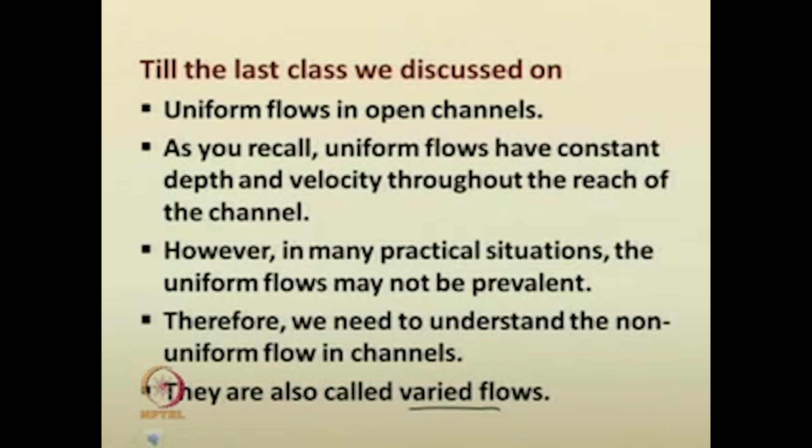So what are the various types of varied flow, or what is meant by varied flow? Generally, non-uniform flow in open channels is called varied flow. You may encounter several types of non-uniform flow. Some of the cases you might have seen: if you construct a dam, from the spillway the water splashes out to the downstream. This is a particular type of non-uniform flow. We will discuss what category of non-uniform flow this is called, in the later part of this lecture series.

You will see that if there is any block in the flow path, the water in the upstream gets raised, and a wave may get generated. These things are also non-uniform flow. So we will deal with all those things.

Non-uniform flow is mainly based on how the uniformity of the flow condition varies with respect to space as well as time. If the flow varies with respect to time, it is called unsteady flow, and if it varies with respect to space, it is called varied flow—in hydrology courses one might have already studied distributed flow, lump flow and all. So we will see, according to our course structure, how to study these non-uniform flow mechanisms, how the flow may vary with respect to space, time, or both.

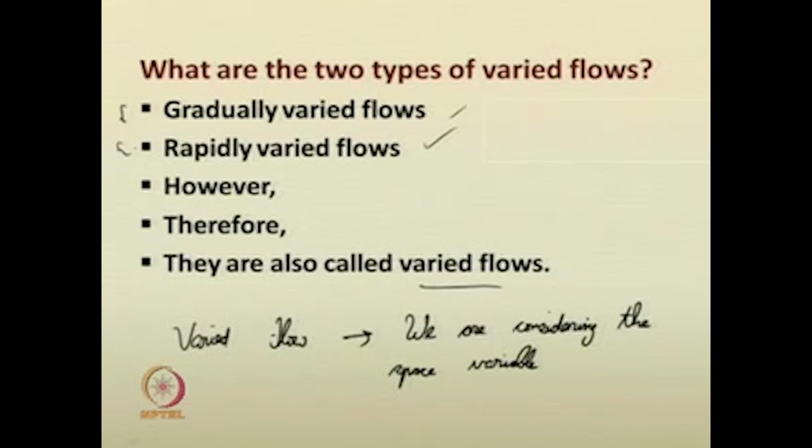So two types of varied flows are there. In addition, if the flow varies with respect to time, that is also taken into account, and those categories of flow are called spatially varied flow. I have not written it here, but those quantities also come into picture in general open channel flows. So we will begin with the gradually varied flow.

So, we can give a short form GVF also. Here onwards, wherever I give this abbreviation GVF, it means gradually varied flow. Gradually varied flow in open channels is a non-uniform flow, as we mentioned earlier.

The flow aspects like depth of flow, velocity of flow - especially these two properties change gradually along the reach of the channel. So if you have a certain reach of the channel, it may gradually change the depth of flow. Say here the depth is y1, here the depth is y2. As it proceeds from upstream to downstream, over a certain distance, the depth of flow is getting reduced. So this is a gradually varied flow - that variation in the depth of flow is gradual. Similarly, the change in velocity of the flow is also gradual.

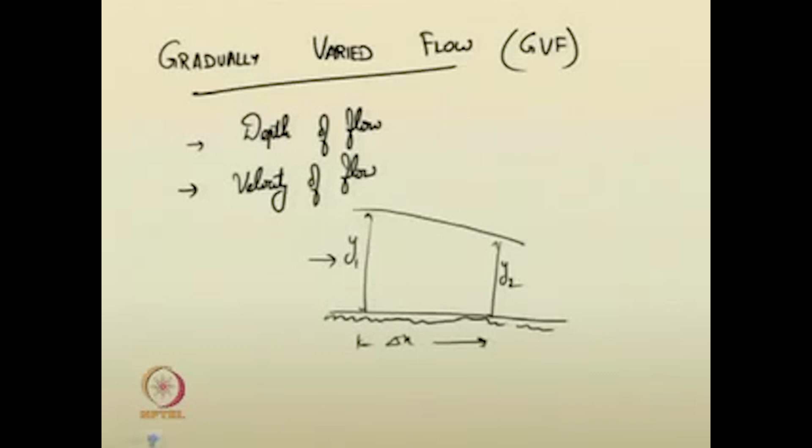A question I like to ask you is, why is the flow called gradually varied? Why is it called gradually varied flow? If you have specific answers or know about that, please tell them.

So the flow aspects, as I mentioned earlier, change gradually. Even a layman may not be able to witness the change in the flow aspects - that is the depth of flow and velocity of flow - the changes between one section to another section cannot be seen. It is varying only gradually. Therefore, many of such flows are called gradually varied flow.

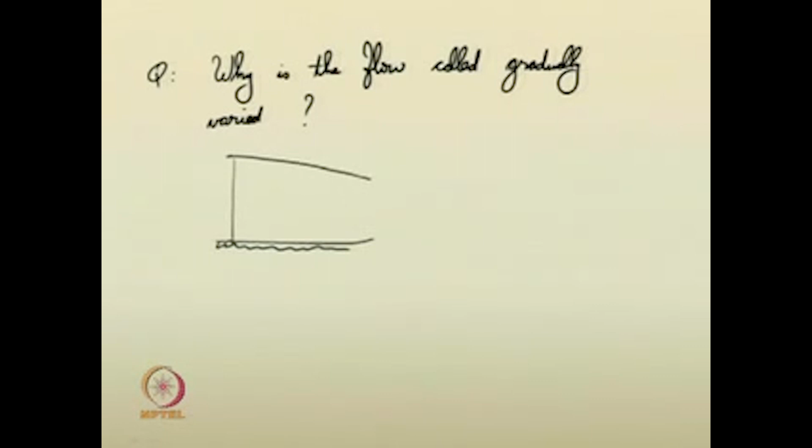So I can give this in a figurative way: say the depth of flow from initial to this point is gradually varying after a certain traverse. This is y2. This is a particular type of gradually varied flow. You may also see a gradual increase in the depth of flow. Such types are also witnessed in many open channel conditions. They are all due to the change occurring gradually. It is generally called gradually varied flow.

Moreover, if the depth of flow is decreasing as it flows from upstream to downstream, then the water surface profile is called a drawdown curve. If the water surface is increasing gradually as it flows from upstream to downstream, then the water surface curves are called backwater curves. One can easily understand the meaning of these terms, so we are not going to further discuss the language of those terminologies.

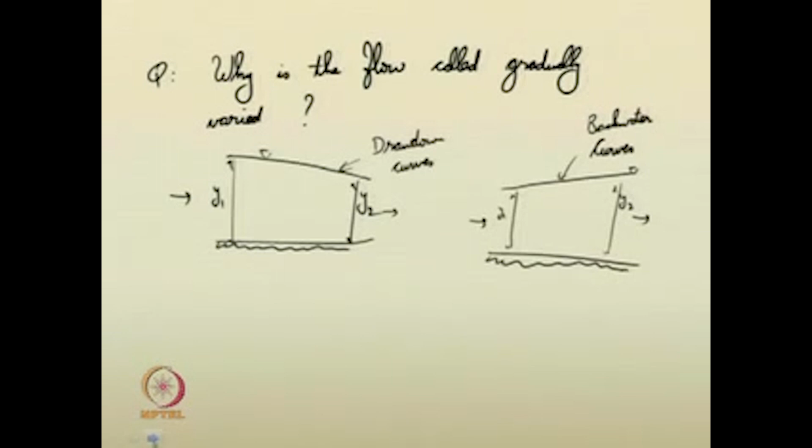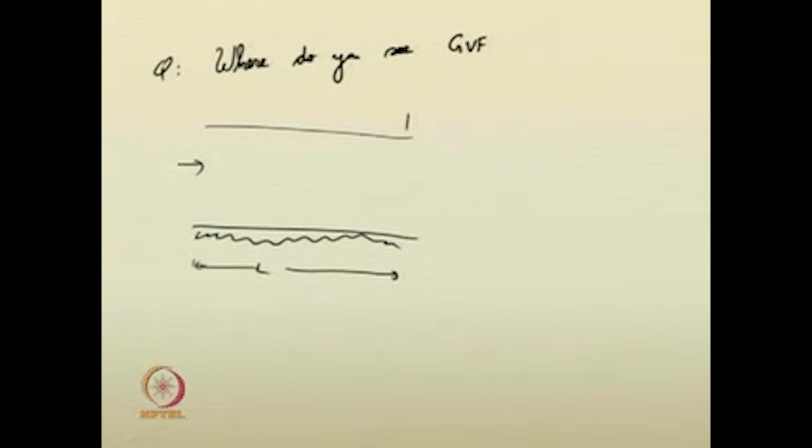Next question I would like to pose is, where do you see gradually varied flow? For example, let me draw a river bed, taking a considerable reach of the river. Say there was initially a uniform flow in the river. Suppose you construct a dam now across this channel. Initially the water surface was of this form.

Now, due to the dam construction, you may see a gradual increase in the water surface. This is a backwater curve. This is gradually varied flow. In this case, the depth of flow is gradually increasing as you move from upstream to downstream.

One can also see, for example, in the same type of channel having uniform flow, if it witnesses some sort of sudden drop in the bed of the channel - the bed can suddenly drop. You may have seen some step channels where the bed just drops in a step form. Now the channel was already having uniform flow. Due to this drop, you may see a gradual reduction in the depth of water like this.

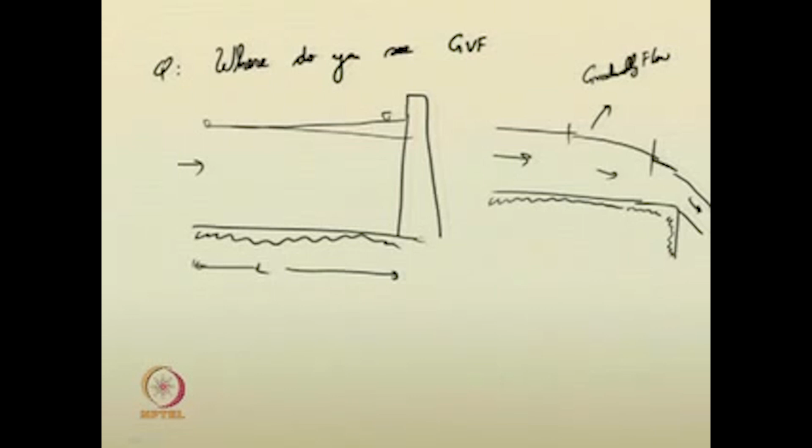Then it will flow like this. So this portion is also a gradually varied flow - it is also a gradually varied flow phenomenon. So you can see gradually varied flow in such situations as well. These are some of the two classic examples where gradually varied flow is witnessed.

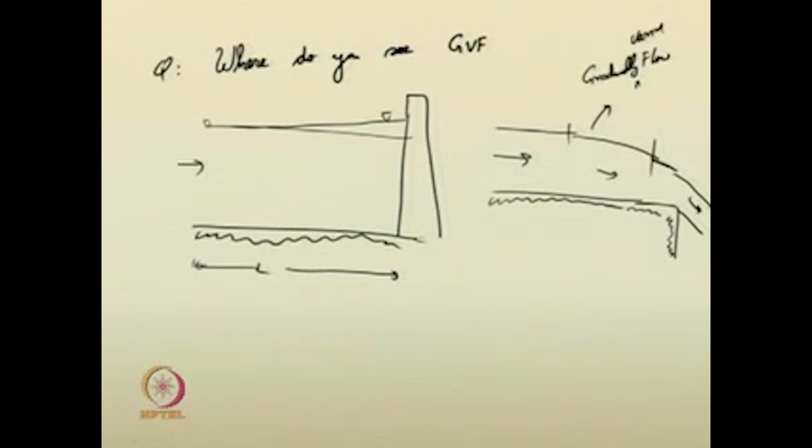What are the assumptions involved in gradually varied flow? Let us enumerate some of the assumptions. The premier and most important criteria is that gradually varied flow is steady. I mentioned earlier you can have varied flows - non-uniform flows - with respect to space as well as time. Here the flow is not varying with respect to time, it is a steady flow. Still, as it varies with respect to space, this term comes under the varied flow criteria category, and the parameters change gradually, therefore it is gradually varied flow.

So gradually varied flow is a steady flow phenomenon. Mostly we consider the hydrostatic pressure distribution.

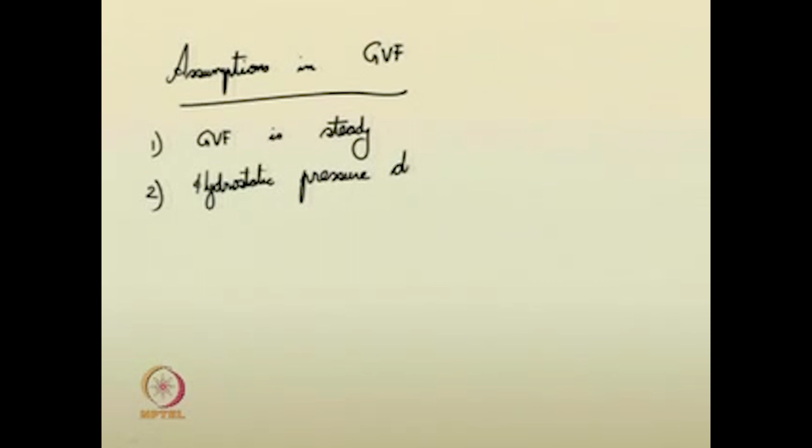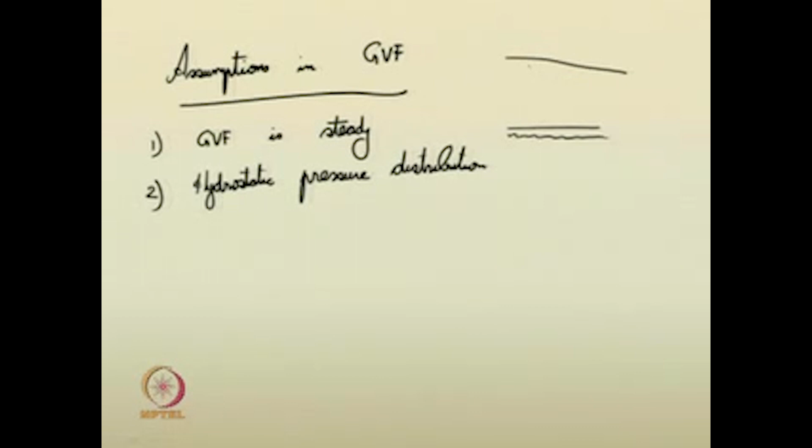Inside the channel, if the channel bed is like this, the flow profile is like that. As you go by depth, the hydrostatic pressure phenomenon is valid here. The pressure increases with respect to depth from the surface of water, in a hydrostatic way. That assumption is true for the gradually varied flow.

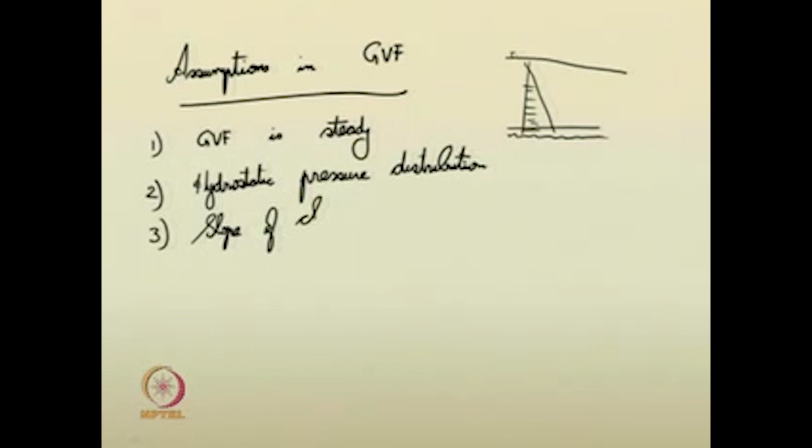We assume that the slope of the channel is small. We are also considering the channel as prismatic, that is, the channel is not changing its cross section as we proceed from upstream to downstream. So that prismatic condition has to be maintained.

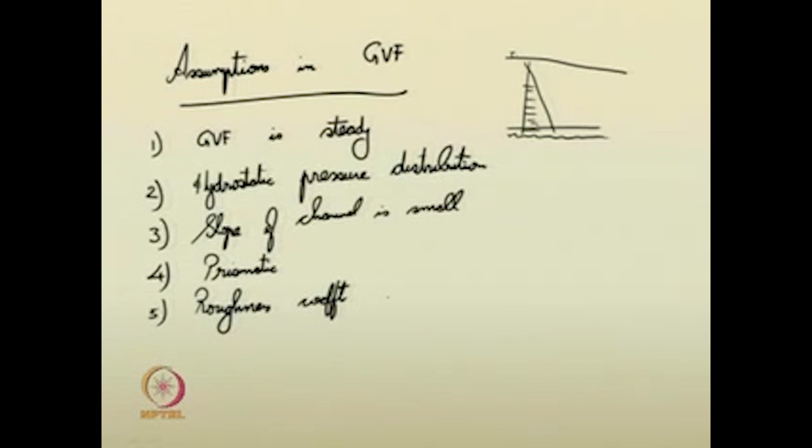We are also suggesting that the roughness coefficient is the same, that it is not varying with respect to depth of flow. It is constant for the problem. So, based on these assumptions, one can start to analyze the gradually varied flow.

As this is a postgraduate course, we will try to analyze it in a more rigorous, more philosophical way, using the general equations that hold good in any of the physics. So those things you have to apply here in the gradually varied flow and try to analyze them.

Let us see the conservation equations for gradually varied flow. What are the basic conservation equations? Conservation of equation for mass, conservation of equation for momentum, conservation of equation for energy, then conservation of equation for enthalpy and all, it is there.

However, as we are dealing with open channel flow, where the flow is predominantly incompressible, the conservation of enthalpy we are not going to consider here in the syllabus. So, the conservation of mass, momentum and energy. Let us see how these equations, how these principles are applied in the gradually varied flow.

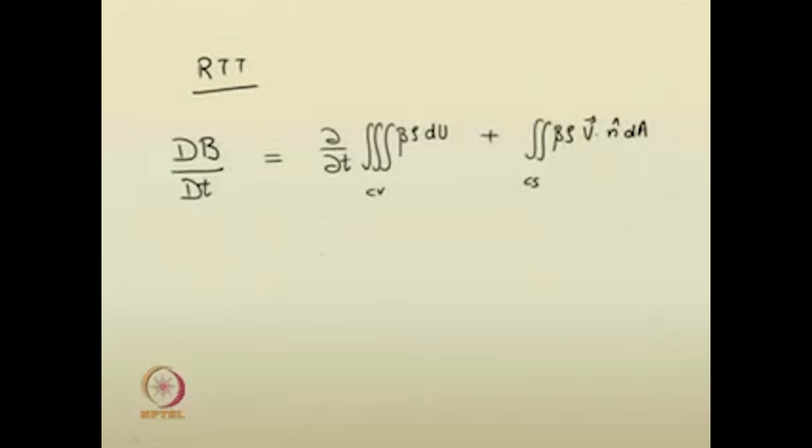Control volume, you can just suggest, say, if I take an arbitrary shape, here I am just taking a rectangular box of dimension del x, del y, del z. If I take such an arbitrary shape, this shape can be incorporated in any volume or any of the continuum you are taking into account. Your fluid, your water, which is a fluid, I hope you know it is a continuum. Most of the analysis on water is based on the continuum approach. So, it is a continuum.

So, if you take any arbitrary volume of the water, with a specific size and specific dimensions, then based on the continuum approach, you can suggest that volume as a control volume. You can also infer that any extensive property on that control volume. So, the material derivative of that extensive property is nothing but the time derivative of the net extensive property generated or lost inside the control volume, plus the net outflux, both influx and outflux being considered, of these extensive properties across these control surfaces.

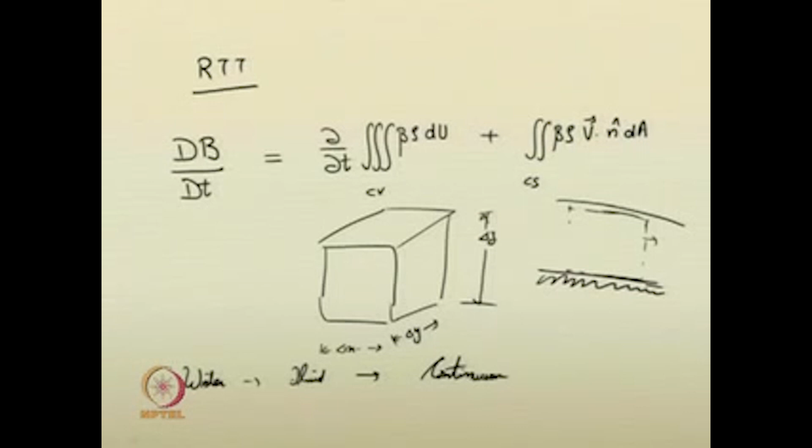So the same property now we are going to apply in the gradually varied flow. Here the channel reach is being taken, and a control volume is suggested.

So you can have the cross section in the upstream like this, and in the downstream like this, whatever it may be. So in this control volume, if you use the Reynolds transport equation...

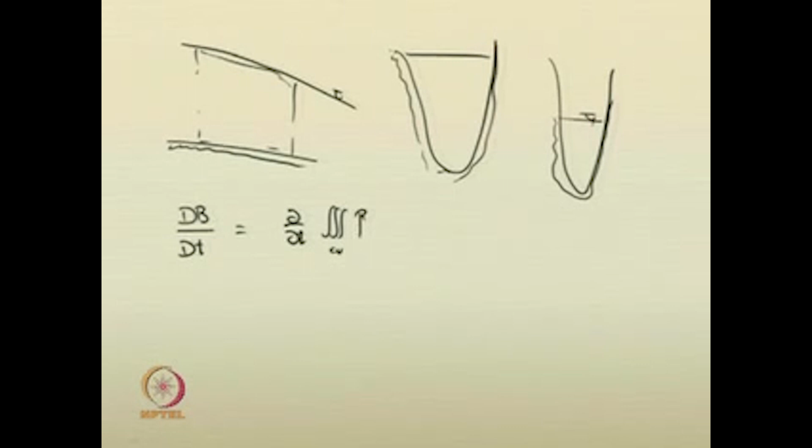Please note that here velocity has been represented in vectorial form, V dot n. That suggests the component of velocity on any of the surfaces of the control volume. Along that surface, perpendicular to it, how much amount of that flux is coming out is being suggested by this quantity V dot n. So you have to try to infer that.

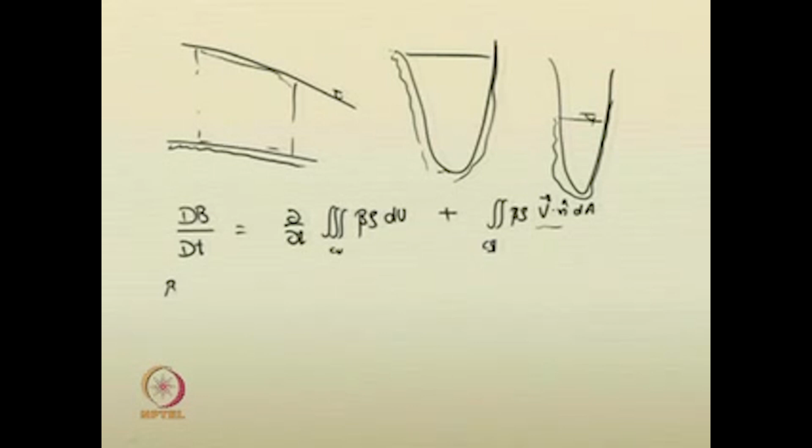B is your extensive property. The properties that are related with mass, if you recall, are given by B, and small beta is the intensive property. Then you have the volumetric integral as well as the areal integral.

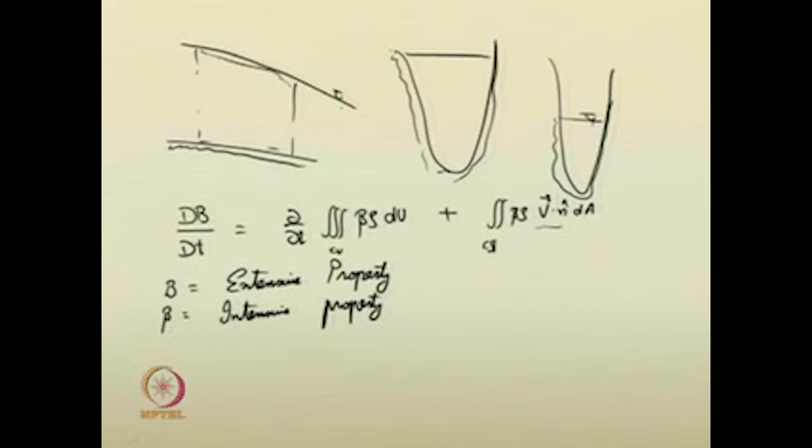So if you apply it to the control volume of the fluid in the gradually varied flow phenomenon here, you will see. Let us start with conservation of mass first.

Let us start with conservation of mass first. So your extensive property is mass. Therefore, the material derivative of mass is 0. I hope you understand that mass can neither be created nor destroyed. The intensive property, m by m, is equal to 1.

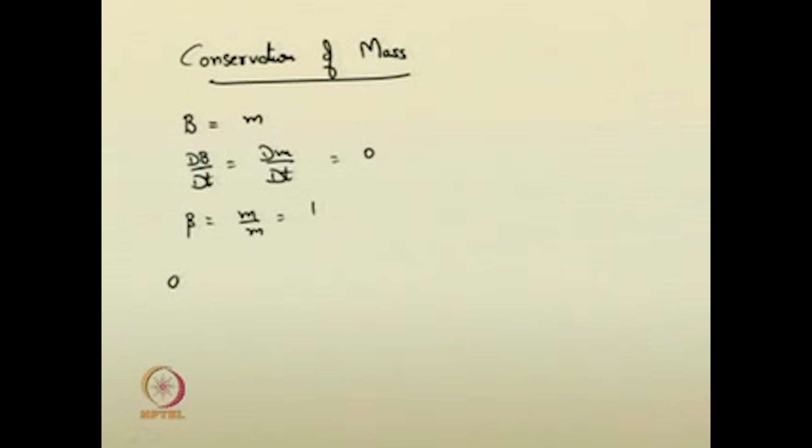Now, very simple thing: there are two terms in this equation on the right hand side. The first term suggests the total rate of change of mass stored inside the control volume.

It is the total rate of change of mass stored inside the control volume, and this quantity gives the net outflux of the mass, the net outflux of the mass of water across the control surfaces of the control volume.

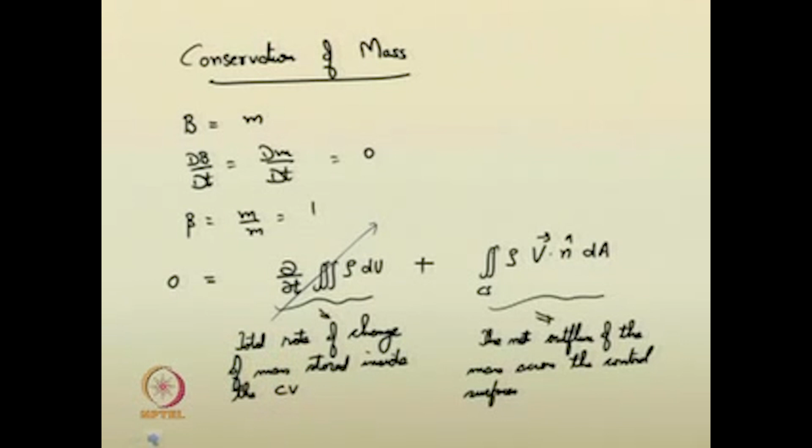Now, recall the assumptions given in the gradually varied flow. As we have suggested, the flow is steady, so definitely you can see that this quantity can vanish. If the flow is steady, this quantity vanishes. So you can now easily suggest the net outflux of mass across the control surface of the control volume is equal to 0.

What does this mean? As we have suggested, the water considered in the control volume is incompressible. So this is nothing but V dot n dA. N is the unit outward normal vector of any control surface you are taking into account. So V dot n is the component of velocity of water that is perpendicular to the plane of the surface which you are considering.

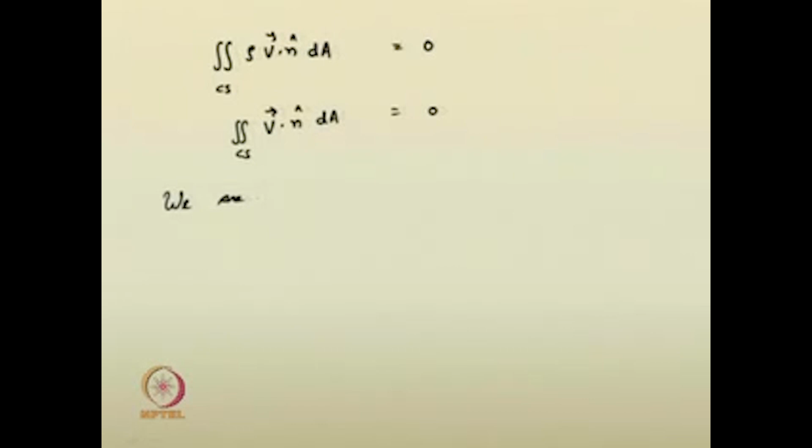So if you expand this thing, we are dealing with one dimensional flow. As mentioned in the beginning of this lecture series, mostly the river flow or channel flow is one dimensional in nature, that is the predominant dimension. Predominantly it will be moving in the horizontal direction, the x direction. So that one dimensional flow is being taken into account, we are dealing with one dimensional fluid flow.

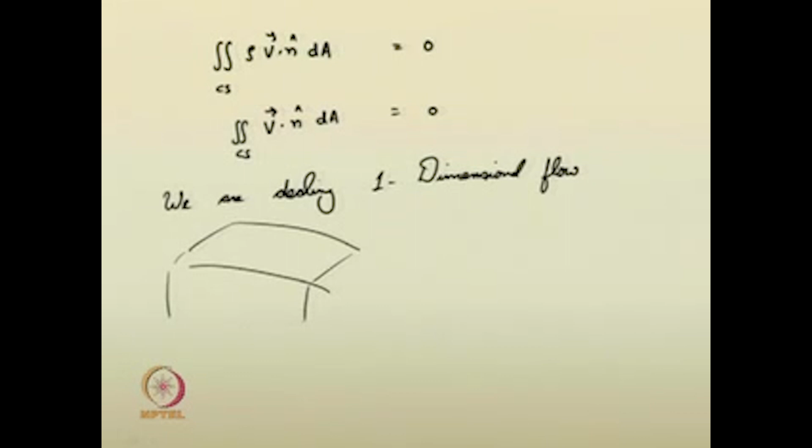So the control surfaces, if you draw it in a three dimensional way, so this is the three dimensional way. This particular surface as well as this particular surface, those two surfaces allow the flow inside the control volume as well as allow the flow outside the control volume. So you can now easily find the things here. I can write this particular equation.

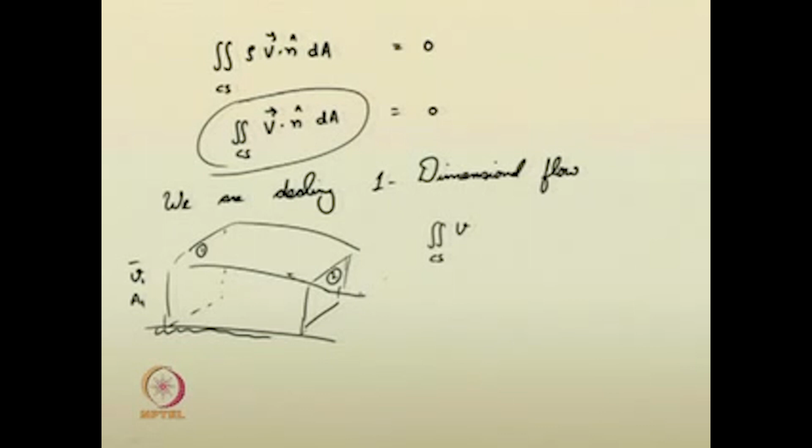So this is section 1, this is section 2. The quantities here are V1, the average velocity across this cross section is V1 bar, area is A1 bar. Let us suggest here it is V2 bar, A2 bar, depth of flow it is Y2 here, and here it is Y1.

So these things, V dot N dA, is equal to 0. As this is a dot product, you are only taking the magnitude of the velocity, the average velocity for the entire cross section of the area. The outward normal vector for the left hand side is in the negative direction of x, whereas for section 2 the outward normal vector is in the positive direction. So V dot n for section 2 is a positive quantity, whereas V dot n for section 1 is a negative quantity.

So I can write this as minus V1 bar A1 bar plus V2 bar A2 is equal to 0, where V1 bar is the average velocity in the cross sectional area A1, and V2 bar is the average velocity in the cross sectional area A2.

So what does this mean? V1 bar A1 is equal to V2 bar A2. This is your discharge Q, and as we have already mentioned, the flow is steady. So the discharge across any cross section will be the same, only the velocity and the cross sectional area will be different.

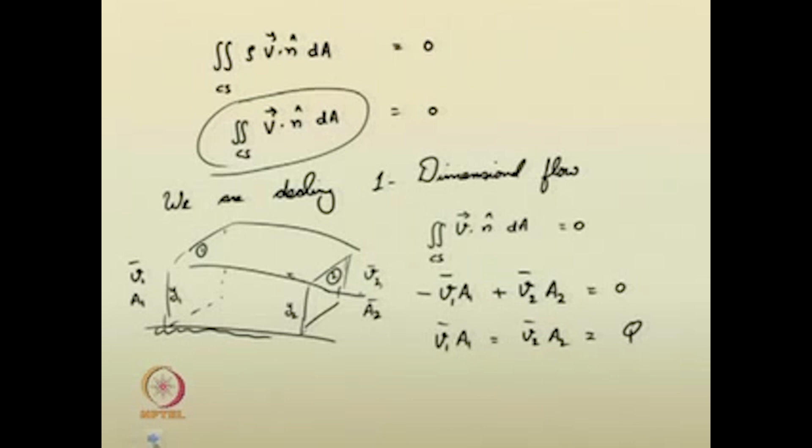So that gives you the continuity equation. If you want to deal with the conservation of momentum equation, the same control volume approach you take.

Again, let me write the same equation: dB by dt is equal to d by dt of the volumetric integral of beta rho dU, plus the control surface integral of beta rho V dot n dA. dU is the integral variable; if you integrate dU for the entire volume taken into account, that gives you the total volume.

Now your extensive property B is equal to m into V. I can give it in vectorial form also, it does not matter. Let us give it in vectorial form in the beginning, later we will take the magnitude. Therefore your beta, small beta, will be equal to V.

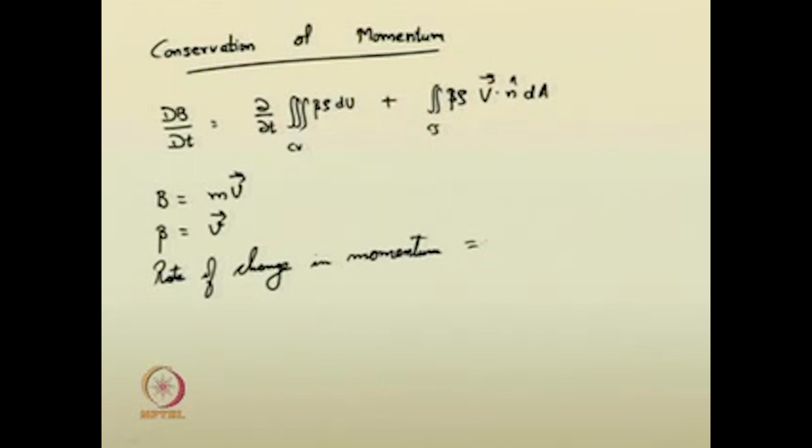According to the physics law, the rate of change in momentum is equal to the net force acting on the control volume. That is the physics law. According to Newton's law, the rate of change of momentum is equal to the net force acting on the control volume.

As we have suggested, we are taking one dimensional flow into account. So the net force now you have to deal with in the direction of flow, say the x direction. So I can give the net force as sigma Fx, which is equal to the rate of change of momentum with respect to time in the x direction.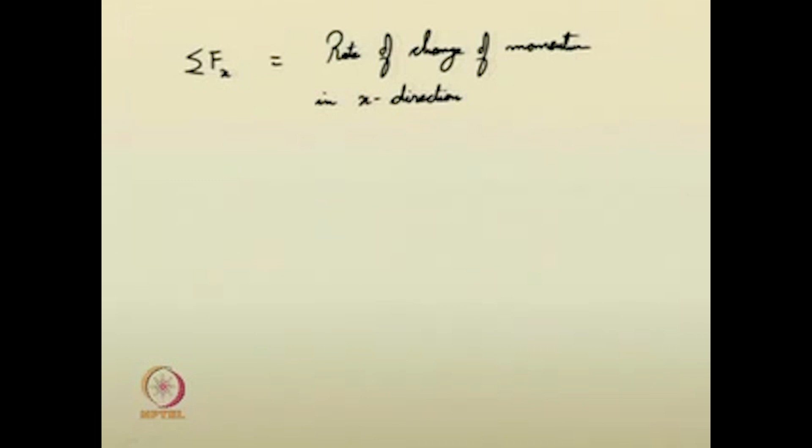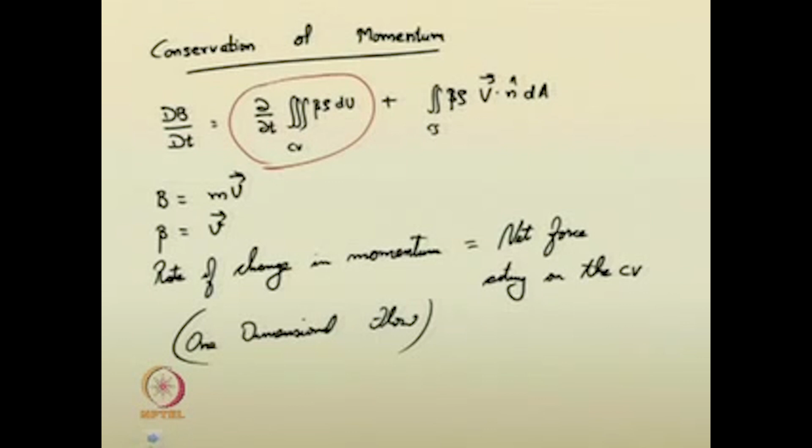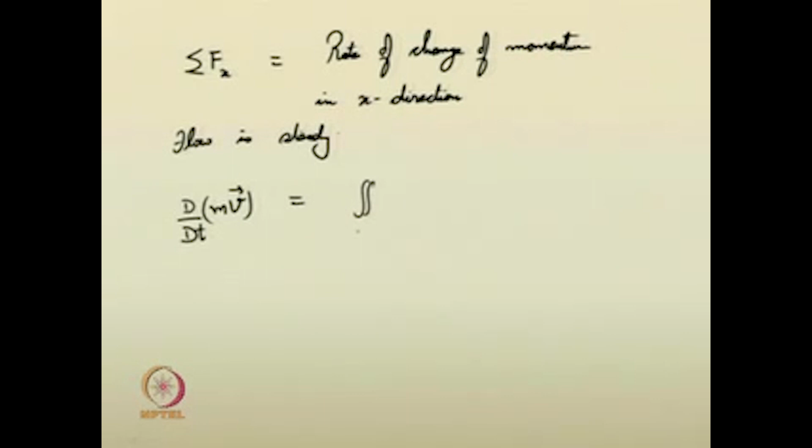The flow is steady. So if the flow is steady, what does that mean? This particular portion of the equation vanishes. So you will have this equal to V rho V dot n.

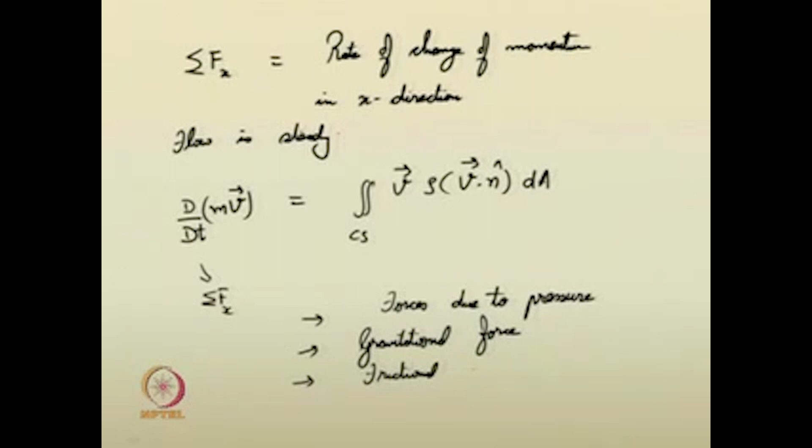So the net forces - what are the various forces acting on the control volume that you need to interpret - this gives you the net force. As we are dealing in the x direction, we can suggest sigma Fx. So the net force acting in the x direction: forces due to pressure, gravitational force, and of course the frictional forces. If you recall the uniform flow, there also we dealt with the same approach - forces due to pressure, gravitational force, frictional force, all these things you need to take into account.